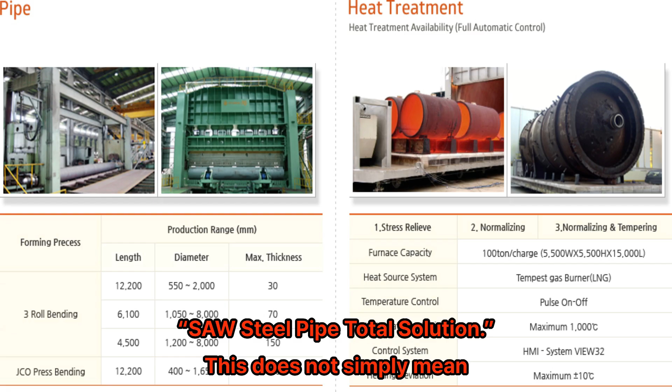Hyundai RB's motto is clear: SAW steel pipe total solution. This does not simply mean a company that produces steel pipes. It means we are a total solution company, responsible for the entire process required for steel pipe production, including equipment, processes, technology, quality, and operator training.

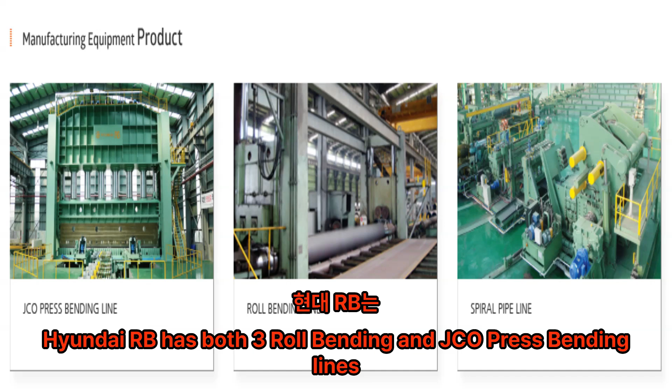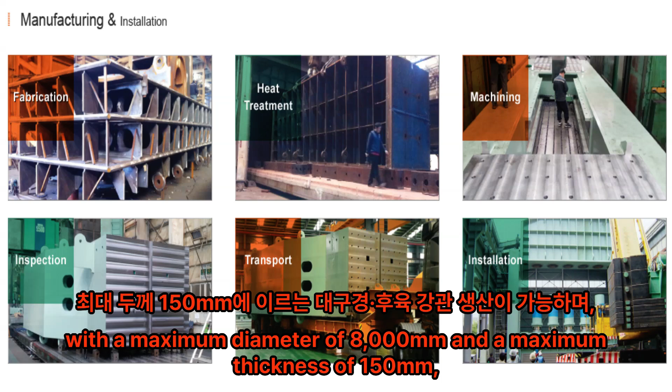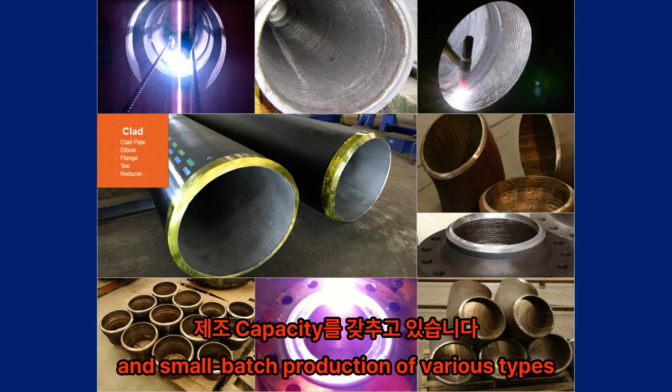Hyundai RB has both 3-roll bending and JCO press bending lines based on the highest level of production facilities in the country. We can produce large diameter and thick-walled steel pipes with a maximum diameter of 8,000 mm and a maximum thickness of 150, with an annual production capacity of 180,000 tons. We have manufacturing capacity that can flexibly respond to both mass production and small batch production of various types.

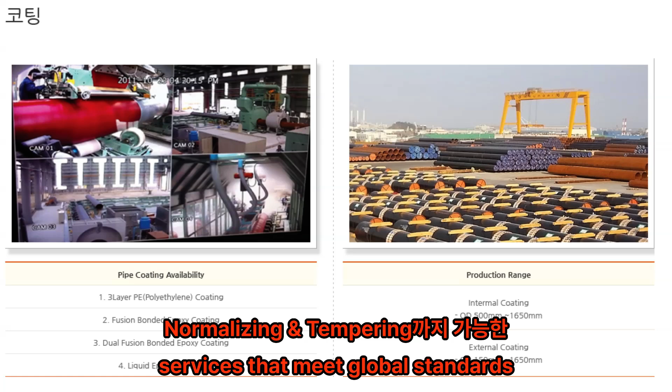Additionally, Hyundai RB possesses differentiated competitiveness in the heat treatment process, providing highly reliable heat treatment services that meet global standards such as ASME and ASTM, through fully automated heat treatment equipment capable of stress relief, normalizing and tempering.

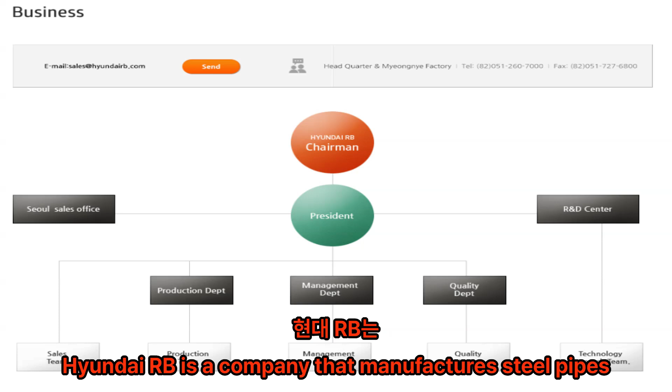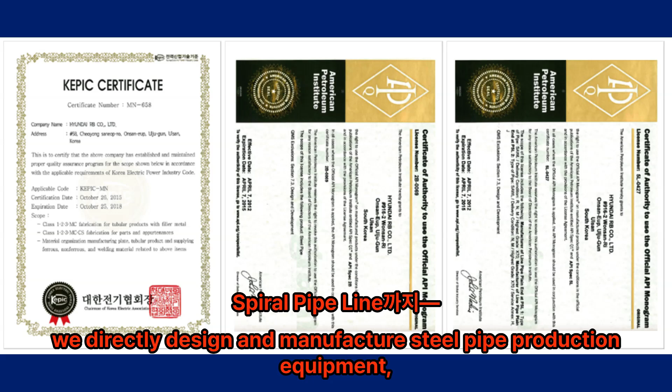Hyundai RB is a company that manufactures steel pipes and also a company that produces the equipment for making steel pipes, from JCO press bending line to roll bending line and spiral pipe line. We directly design and manufacture steel pipe production equipment, offering a complete equipment total solution that includes special equipment, process, know-how, and operator training. This is a competitiveness that is rare even on a global scale.

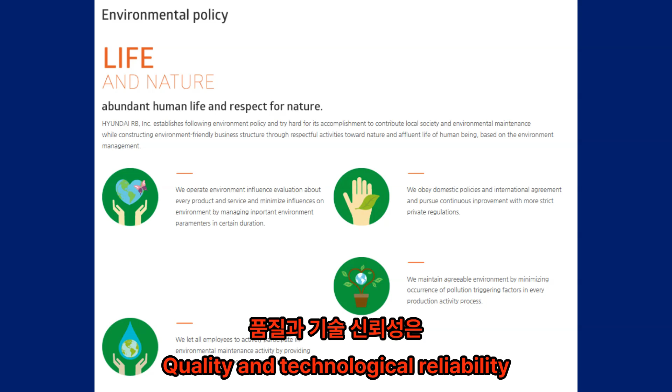Quality and technological reliability are proven through global certifications such as ISO, API 5L2B, ASME PED, DNV, ABS-BV, and KEPIC, meeting all international standards required for oil and gas, offshore power, and chemical industries, and have been chosen by global EPC companies like Shell, Bechtel, Technip, and JGC.

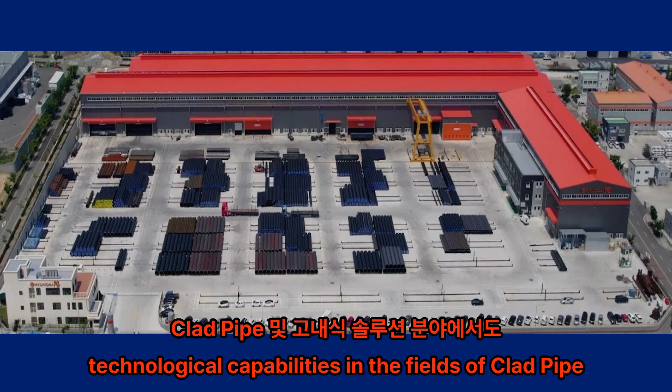Additionally, Hyundai RB possesses outstanding technological capabilities in the fields of clad pipe and corrosion-resistant solutions. Through TIG overlay welding-based cladding technology, we achieve reliable quality even in corrosive and abrasive environments, and it is applied across flowline, offshore, and various plants.

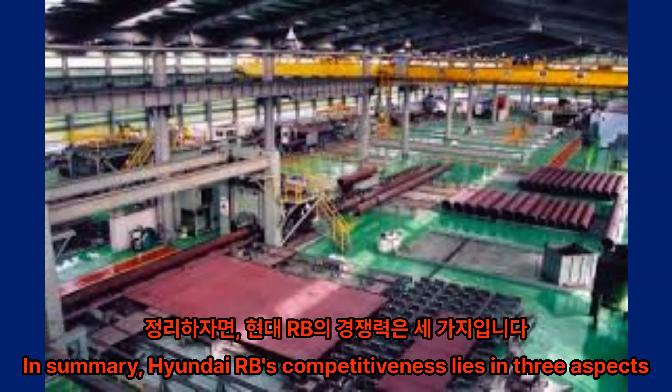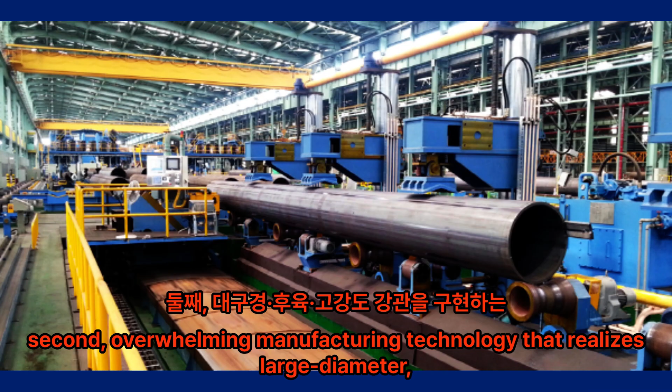In summary, Hyundai RB's competitiveness lies in three aspects. First, the capability of providing a total solution for SAW steel pipes, from equipment to steel pipes. Second, overwhelming manufacturing technology that realizes large diameter, thick-walled, and high-strength steel pipes. Third, quality reliability, based on international certifications validated through global projects.

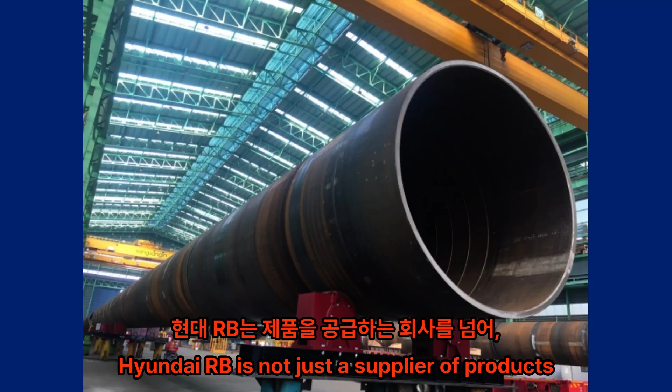Hyundai RB is not just a supplier of products, but a partner that designs the production competitiveness of our customers. Hyundai RB: SAW steel pipe total solution, and maintaining relationships through quality.